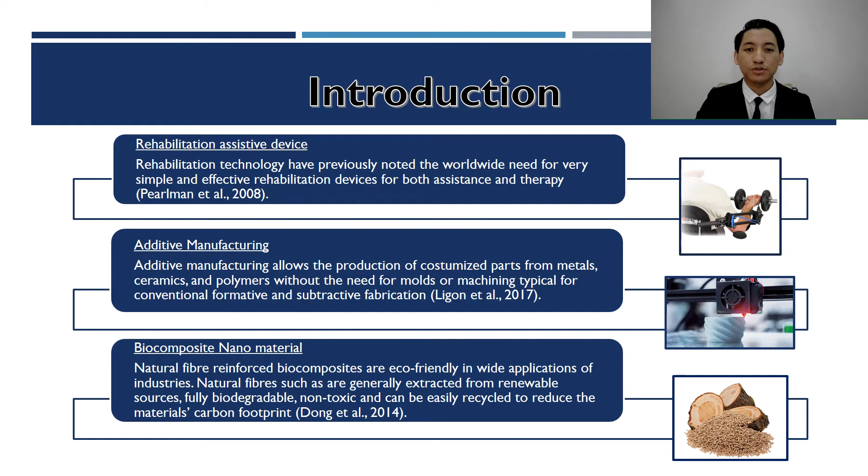Next, I will explain the problem statement. Due to the advancement of additive manufacturing, polylactic acid or PLA is widely used in many kinds of areas because it is well known for its environmental sustainability, which leads to an increasing demand. So the problem statement of this research is that PLA has low strength and is brittle in terms of characteristics and over a period of time. Next, PLA tends to absorb moisture and also degrade due to exposure to UV light, hence reducing its mechanical properties.

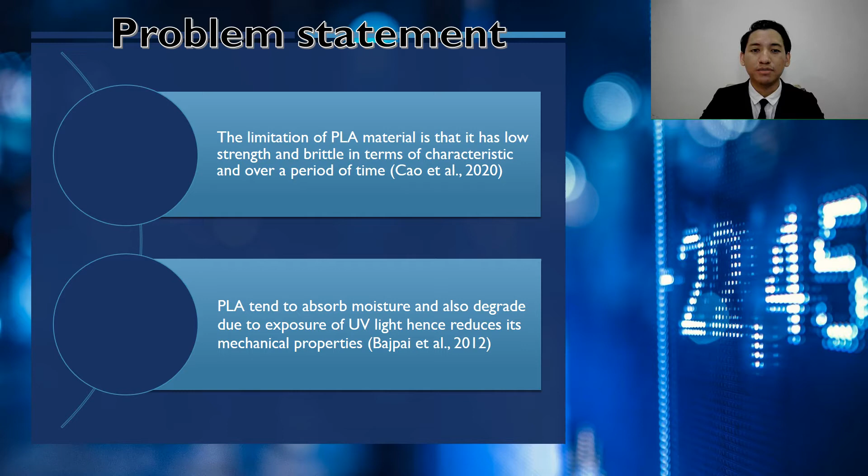Next, I will explain the objectives of this research. The first one is to analyze the tensile strength of thermoplastic additive manufacturing materials in the usage of assistive device application. Second, to determine the compatibility of natural fiber and distribution of nanomaterial in the matrix biocomposite through morphology studies towards the application of the assistive device. Third, to compare the tensile strength and morphological compatibility of nano-advanced material and thermoplastic for the assistive device.

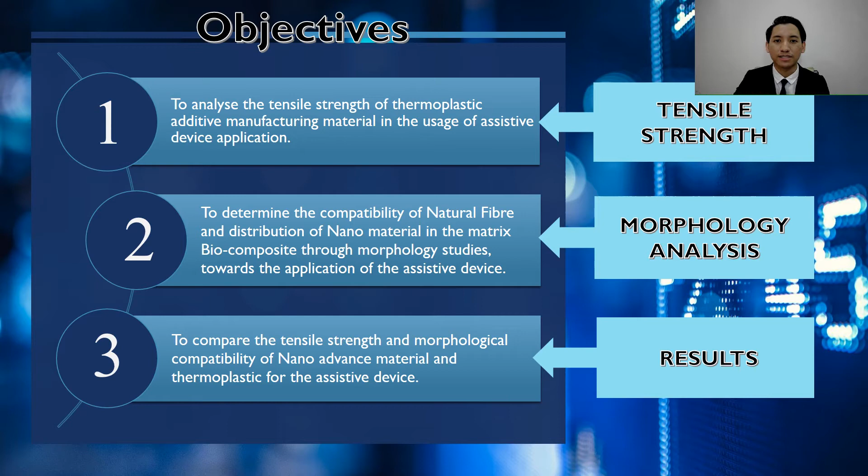Next, I will explain the scope of this project. The scope of this project will cover research on the effects of biocomposite nanomaterial to human bodies based on the static tensile strength analysis. This research is more focused on utilizing the type of fiber and nanomaterial used in the composite, resulting in the required suitable or compatible strength. Next, to analyze the effect of biocomposite nanomaterial, which will create cross-links between nanomaterial and polymer. This can be confirmed through morphology study.

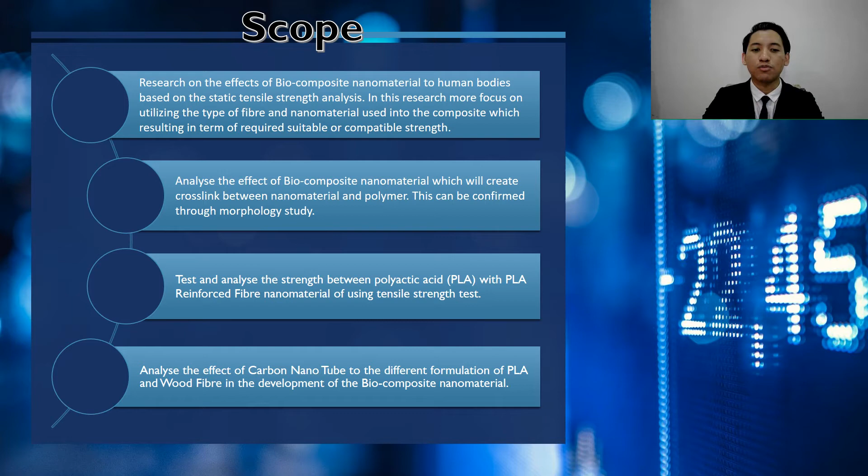Next, test and analyze the strength between polylactic acid PLA and PLA reinforced fiber nanomaterial using the tensile strength test. And last, to analyze the effect of carbon nanotube on the different formulations of PLA and wood fiber in the development of the biocomposite nanomaterial.

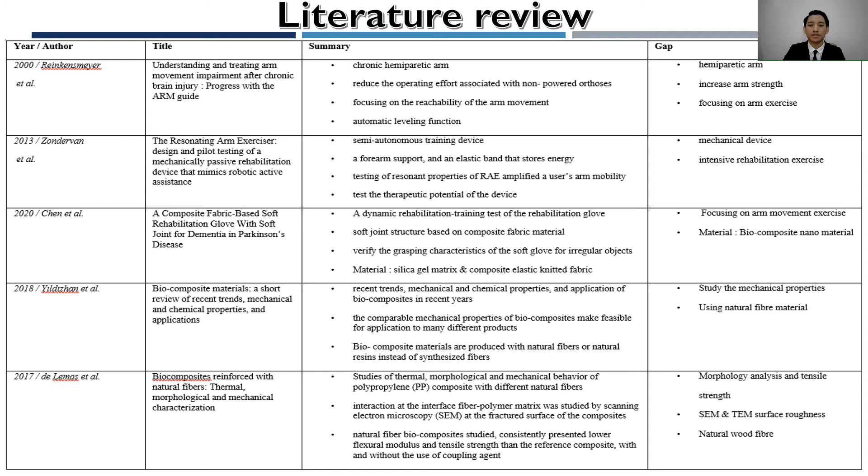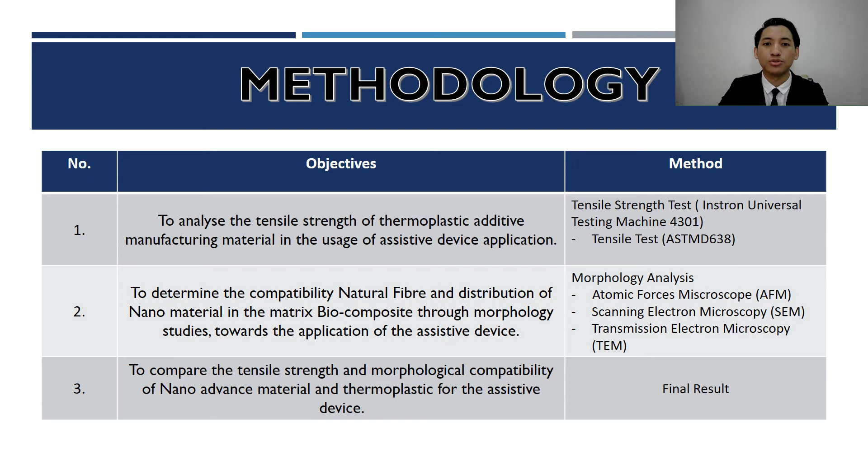Next is methodology. The table shows the relation between the objectives and the methods used in this research. The first objective will be determined by using the tensile strength test. The second objective is proven using morphology analysis, which is AFM, SEM, and TEM. The third objective is determined through the results of the test and analysis.

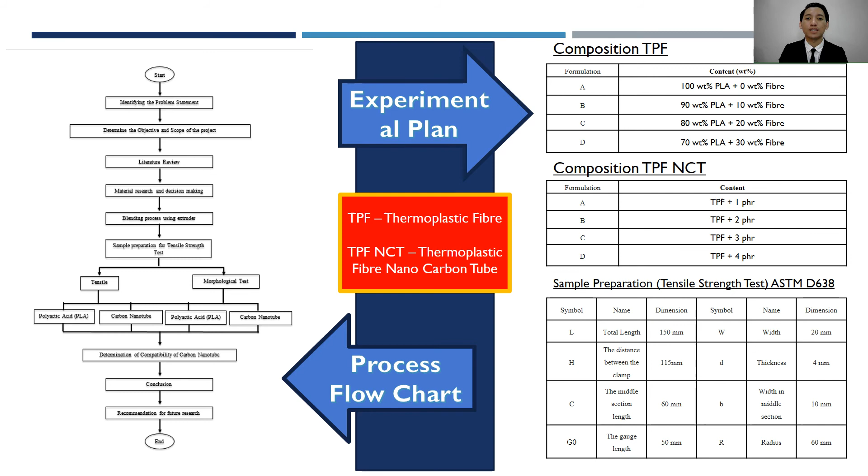On the right side of the slide is the experiment plan of this research. The first table shows the composition of thermoplastic fiber with different formulations of PLA and fiber material. The next table shows the composition of thermoplastic fiber nanocarbon tube material, and all of the formulations will be tested using the tensile strength test in order to identify which formulation has the highest mechanical property. The last table shows the sample preparation of the dog bone specimen for each tensile test.

So this research is expected to obtain the suitable composition of TPF and TPF NCT, to obtain the result of mechanical properties of tensile, and to obtain the result through AFM, SEM, TEM analysis for the internal behavior of the specimen and the surface roughness of the samples.